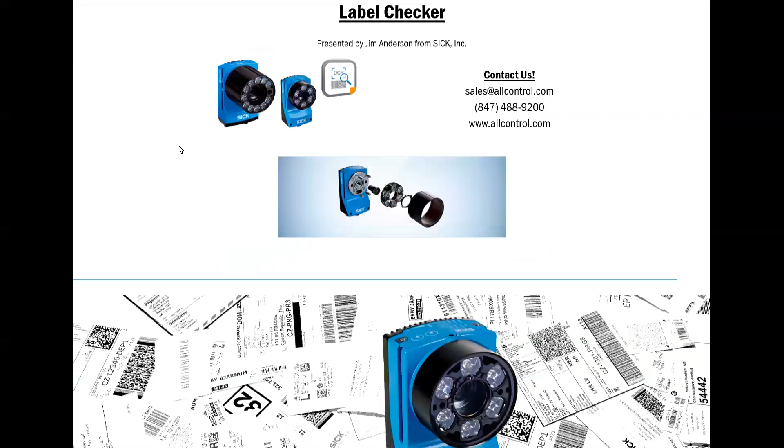So the label checker, what is it? The label checker for us is a way to really increase the competitiveness in a growing 2D marketplace. We see a lot of different camera solutions out there, obviously from some of the big players, Cognex, Keyence, Omron, other cameras, and we wanted to come up with a solution that would be obviously competitive, but also unique in some ways, and that's where we think that the label checker really steps forward.

It has a lot of high-end tools, but also a very simple user interface, no software to install, basically all done through a web system. Very powerful optical character recognition with the optional deep learning technology built in for improving reads, and also 2D inspections for pattern matching, blob counting, measurement of position of a label or the size of a label. So lots of different things that the label checker can do, and then it's all in a predefined small package, and easy to operate user interface.

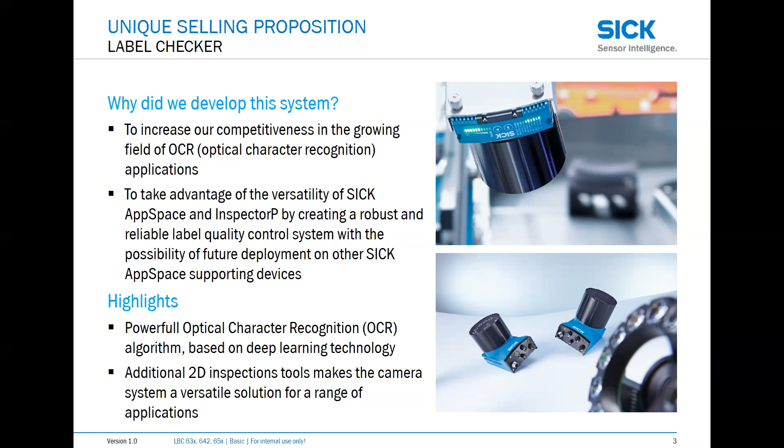So only the tools that you would kind of use for these applications, but also part of a larger system that if you wanted to expand into the rest of our portfolio, you would have access to a greater imaging library if needed.

This is based on our SICK app space architecture. So we have a set of hardware and a programming language that we can install very specific application solutions onto for a customer. And we have partnered with a global software company, MVTec, who makes the Halcon imaging library, and we have that also built into the SICK devices.

So you have the SICK library and the Halcon library available for really pushing those vision needs if needed.

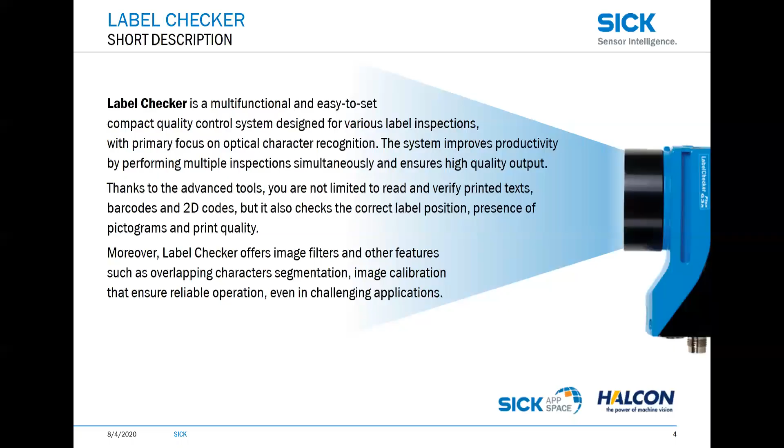The portfolio, like I said, we have a base set of hardware that is used across these different products, and the label checker and the lector are all based on the same platform, but it's a matter of what functions you can do and what software is loaded onto those devices. So the lector is a barcode reader with some OCR capability, or the label checker is a full vision system with true OCR code reading and 2D inspections.

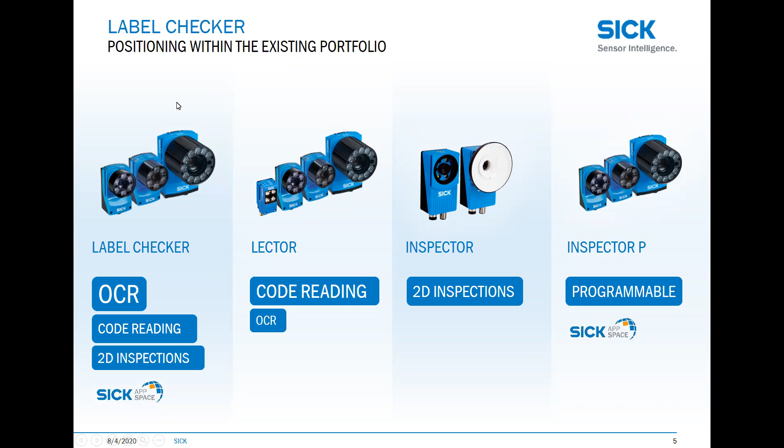And then on the far right there, you have the Inspector P, which is a fully programmable device, so you can write any code that you wanted and put that onto that type of camera. We've basically taken that Inspector P, written a very specific application, and that's what we call a label checker.

You can read characters and verify that they're the correct characters. Read multiple barcodes, 1D and 2D simultaneously. And then if you did need to add something in there, you could check for printed patterns, measure different pieces, but you could also add some of your own custom software if really necessary.

A number of different versions of the label checker exist, ranging from our label checker 631, which is a 1.3 megapixel device with options for S and C mount lenses, going up to the label checker 654, which is over 1-inch optics, a 4.2 megapixel camera with options for both manual C lenses and an autofocus lens that we have in that platform. So quite a range of products depending on what your needs are for your application.

This is a platform based on the Inspector P. So we have a number of pieces - you can buy the individual camera, lens, light, and hood, or you can buy the label checker kit, which has all these things already pre-assembled. Then you would need to buy a gigabit Ethernet cable and a power I/O cable, depending, and all these are available in multiple different lengths and options, depending if you're connecting it directly to power, or to one of our connection boxes. We have double-ended cables that make it even easier to mount the camera.

The label checker for us really opens the door to a number of different industries. SICK plays in all these different industries already: packaging, pharmaceutical, electronics, logistics, food and beverage. We really see the label checker having a strong play in packaging, food and beverage, and some in machine building, as the ability to do batch codes and read peen codes and laser etched codes is something that the label checker does really well.

That also gives way to some automotive applications. Logistics is something that we can do because we can verify print quality and label position and read the barcodes, obviously, but we tend to have other products that are maybe a little bit more suited for the logistics market. But packaging, food and beverage, automotive, and machine building are the main places that I would see the label checker being used.

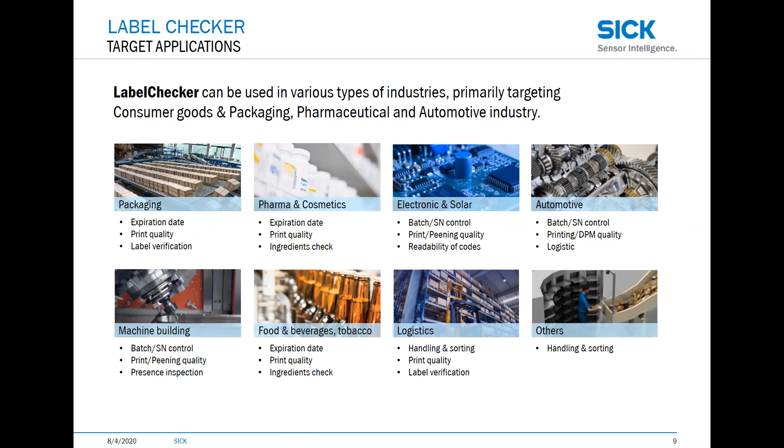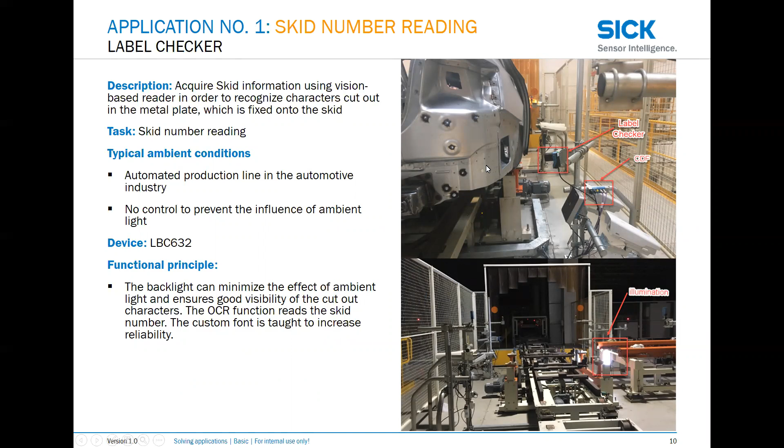Next to this system is an RFID reader that's reading the RFID tag that's connected to the body of the vehicle. And underneath the car, there's a carrier number with an etched out number. We are using the OCR functions to verify that the carrier number matches the RFID - the information in the RFID tag - to say that they match before proceeding with any of the additional functions in that robotic cell.

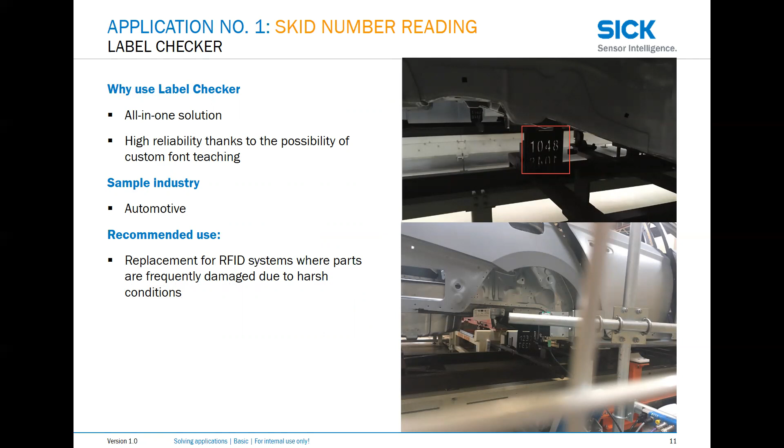Because they are both based on the SICK ID4 platform, they have the same communication protocols. Our RFID channel and our label checker can communicate seamlessly, and one can pass that information to the other saying yes or no, that is a match.

Another application is checking food labels. In this case, we're looking to control, just read the barcode and make sure that the object locator is finding the barcode. There's a pre-printed label, so we find the position of the logo, and from that logo, search for the position of the barcode.

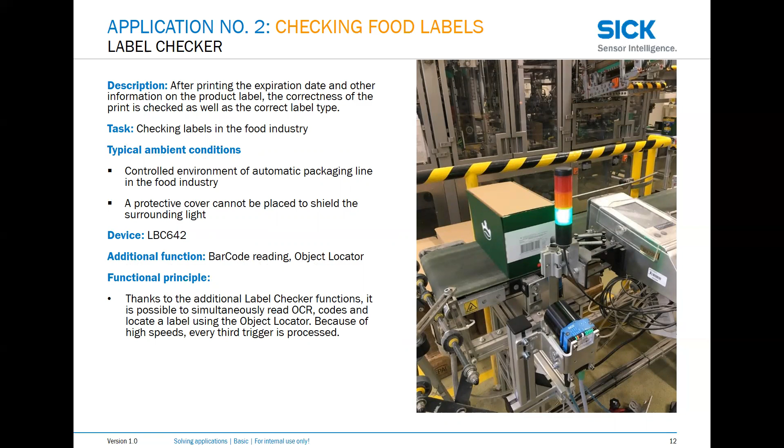It's a really simple setup: photo eye trigger tells the camera when to take an image. We have strong OCR functions built in, with the ability to use several native fonts built into the camera, which is a difference from a number of our competitors. A lot of our competitors can do OCR, but all the text and fonts must be taught. Whereas with the label checker, we have several fonts built in, including OCR A and B, a universal font that checks basically all the fonts that are possible. And if you can further identify exactly which font it is, you can get slightly higher performance in speed, because it doesn't need to search and test all the different character possibilities.

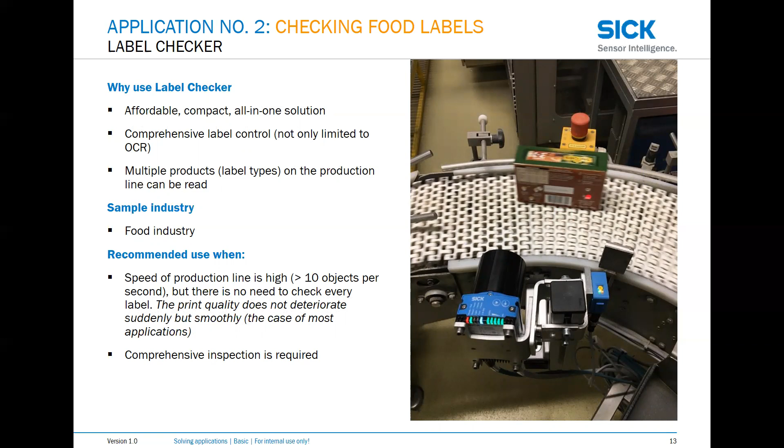But using OCR, you're able to do more than you can with just barcode. Barcode will tell you that it's the correct package. OCR can tell you if that use-by date or the information on there is printed legibly or completely, so the customer can read it. It also gives you another way of tracking, to make sure you didn't have a human error entering that information into your printer, so you can check and verify that the code actually matches with what it's supposed to be on the box.

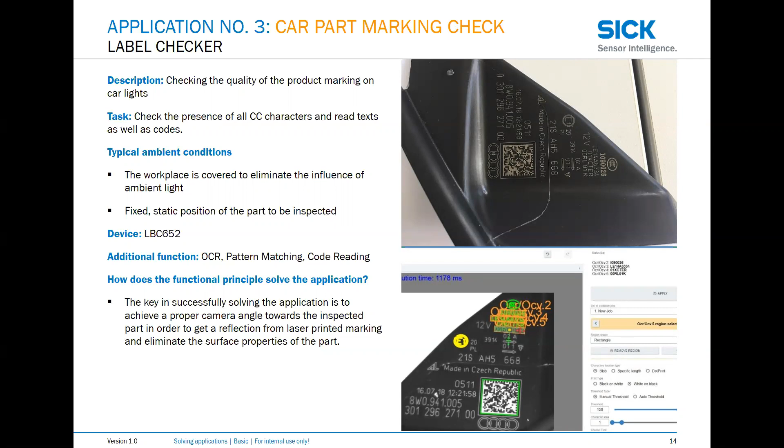Now, using the application functionality built into the device through Halcon, we're able to do some more functions, especially on these etched codes. This is a very good, high quality etched code, but this is one of those functions where we have multiple algorithms, one from SICK, one from Halcon, offering different functions in reading these types of codes. The SICK algorithm is a little faster in reading the barcode, whereas the Halcon algorithm allows for a bit more damage or non-conformity to the standard, so we can read codes that are etched with uneven depth, doing OCR and barcode simultaneously, giving you as a user a lot of flexibility to help in your control system.

So here's maybe the most standard type of label we've seen so far, reading a 1D, 2D code, also reading some OCR. You can see that the camera doesn't care if the text is upside down or right side up. We can invert the image, or search and tell the camera which way the text is oriented. It could be vertical, it could even be diagonal. As long as we know where that text is supposed to be, we can do the correct type of segmenting and then pull that into the OCR algorithm and tell you what characters they are. This is a really strong view of what we can do for OCR and multiple codes at the same time.

In this case, we are using the logo to identify which direction that part is in, and once we find that logo, we know where to search for each of those individual inspections.

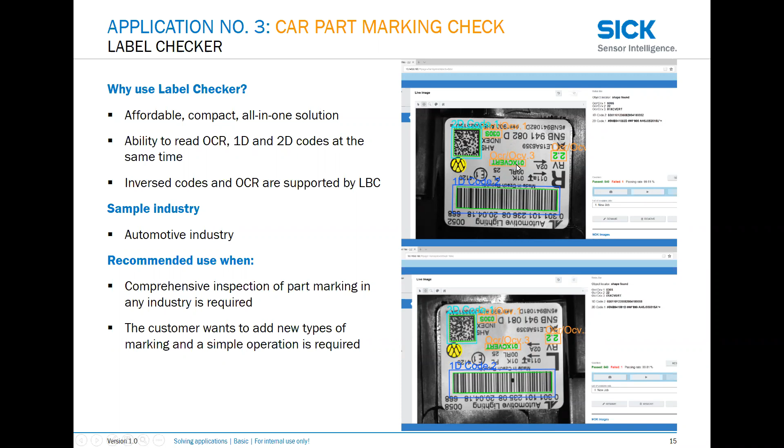One of the features that is not typical in a simple-to-use sensor like the label checker is the rectification feature. So what we have is the ability to calibrate and unwrap a label to make it easier to read, and also to compensate for any distortions that might be in the lens or just in the printing process.

So take this label that's rounded around the circumference and this arch. If you're just reading the barcode, that's not so hard. But if you're trying to read the text, it's not in the same line, and doesn't necessarily even look like it's the same size, because it's a bit further away on some sections than at the center tangent point. So when we use the rectification feature, we basically unwrap that, get a flat image, and now all the characters are scaled appropriately. We can read the barcode, read the human readable text, and also check those logos without having to do any fancy scaling that could slow down the camera.

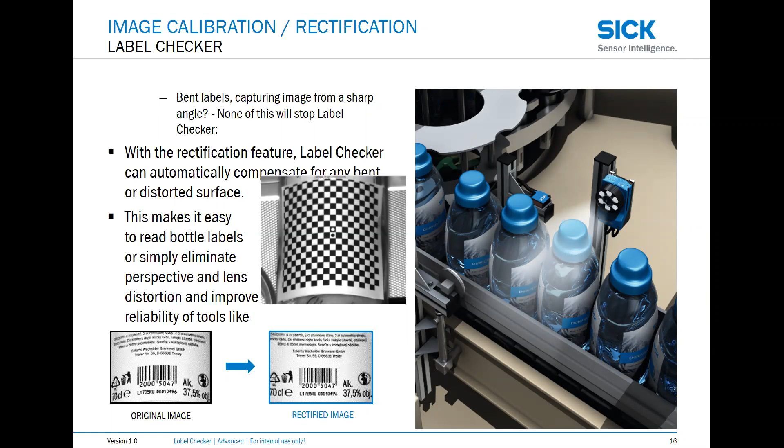So not only does it do the barcode, OCR, and those types of applications, it is capable of doing simple inspections as well. Is the label in the correct position? Is it in the right location relative to the shoulder? Is the cap on? Is the cap seated completely? Using tools like pattern match measurement and blob tools. There are a number of different things that can be done on board the label checker.

If you wanted to count the number of bottles, and there was a code printed on the top of each lid, you could read all those codes and count them based on the presence of the code, or presence of just the cap. So you could say there were 12 bottles, 11 of them also had codes that were read, and that could give you a pass-fail criteria if a certain percentage of products needed to have printing or other inspections before they were allowed to pass.

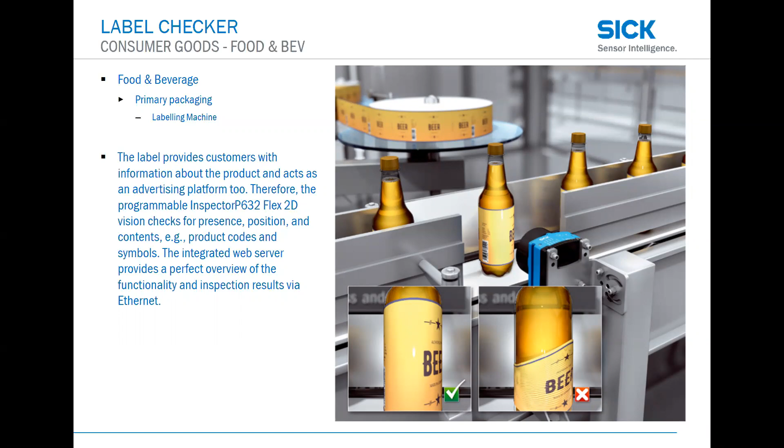One of the first major customers of this was a company that makes chocolates, and they were reading what is actually a pretty long OCR string, two lines, plus a barcode, and in this case we were doing this at about 15 items per second.

The original function requirement for this product was that it needed to do 4 labels per second. After testing, we were able to achieve 15. They were able to increase their speeds slightly, but there were other aspects of their machinery that couldn't keep up beyond the 4 labels they already had in their process.

This gave us a lot of encouragement that the system has a lot of overhead, so we can get in there and give a strong solution without slowing down production, providing both strong code reading and OCR functions.

One of the features that a competitor talks about a lot lately has been the addition of AI or deep learning into code reading or OCR functions, and that is something SICK also has in our OCR. We have the ability to continually add additional features and text to our library, increasing the reliability of the reads.

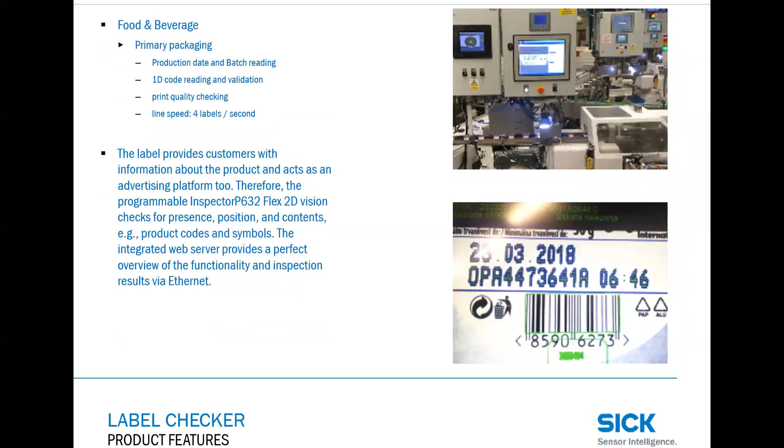Using deep learning, we have the ability to identify and still segment those features and give a good read. So one advantage of this product is the ability to identify and segment touching characters and dot-print characters.

We have the ability to mask out and read a number of different types of barcodes, so we can look for just the presence of, say, a square shape, use that as a reference, regardless of what is printed internally.

We could use a barcode as an object locator. We can use the functionality to read both standard and inverted text and codes. Depending on how it's printed — laser printed, etched, or dot peened — we have the ability to read those types of codes regardless of how they're printed.

We also have some additional inspections we can do with measurements — calibrated measurements — so we can calibrate the system to give you actual millimeter values as opposed to just pixel values.

Multiple jobs, so you can have a system that would send a signal to the label checker, which would allow the information that we're looking for to be switched quickly, have those jobs up and running without having to teach them every time there's a changeover.

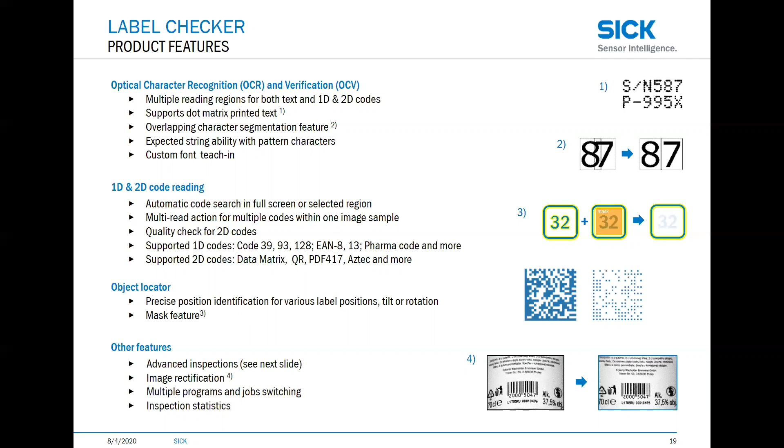Depending on which version of the label checker you're using, you would also potentially have different fields of view that you could use. The device that I have here for my demonstration has a dynamic focus function, so I can change directly from the software the focus position of the camera.

Some additional features that we can do: label positioning, image rectification, and then one of the reasons this is becoming more and more of a need is the label contents detection, looking at if there's potentially allergens or additional symbols on a label, to make sure that those are actually there.

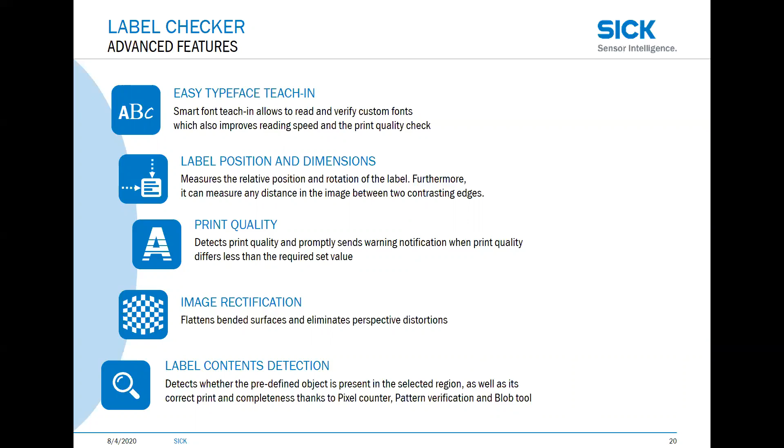If you're working with, say, gluten's becoming more and more that way, but definitely peanut and peanut butter have different functions that are requirements for labels to make sure that those are detected before going further.

We have the ability to add a micro SD card for cloning. So if you had multiple devices or something happened, you could take the settings out from the SD card, plug it into the next camera. It would be up and running basically immediately, other than the focus of the camera.

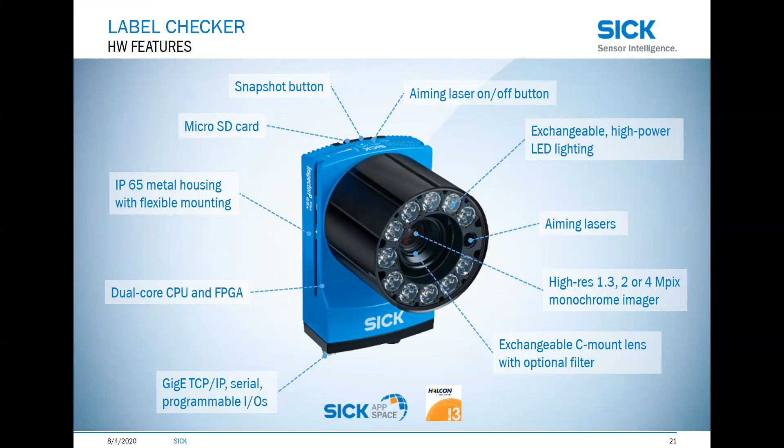We have both a dual core processor and an FPGA, so we offload certain functions of the camera to the FPGA to speed them up. And all sorts of other features, including an aiming laser, so you can see easily if you're at a distance where the camera is looking.

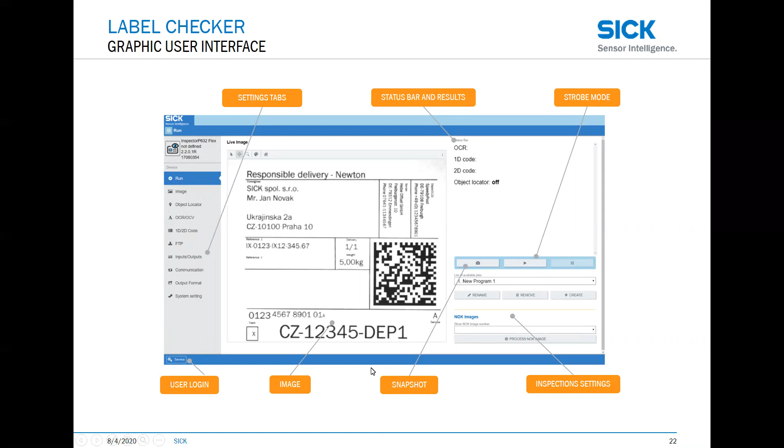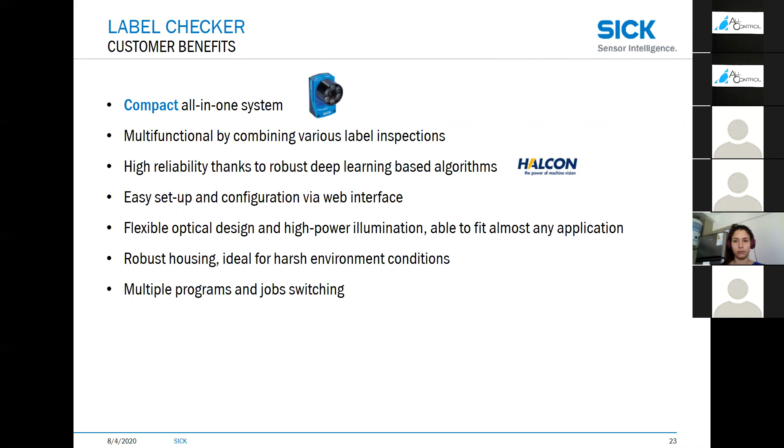It's a compact, all-in-one system with multifunction, combining multiple label inspections, making it truly a true label checker, not just barcode or OCR. It has those additional inspections as well, with high reliability and robust options for deep learning based on the SICK and Halcon algorithms.

It's a flexible design, so you can adjust the lighting and or lensing to fit just about any application. And then there are multiple programs available through job switching to make it even more flexible in your production line. So with that, I would like to go ahead and show you a live setup that I have here.

I'm going to start my camera and show you the setup that I have. I have a camera mounted about 1 meter above a printed target, giving me a real strong focus for this lens that I have available.

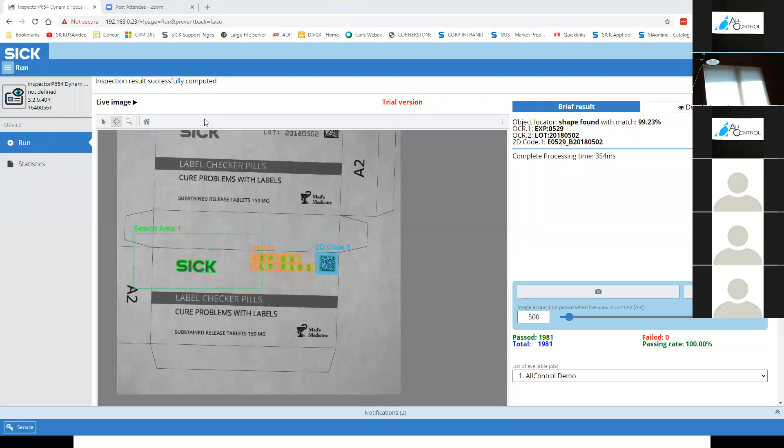And then I will go ahead and show you here in the software. So I type in the IP address of the camera. And you should type it in correctly.

While Jim is doing this, I think it's good to point out that that camera you have has the ability to change in or out the lenses, change in or out different kinds of lights depending on the labels you have. So even though we like to call it a vision sensor because it's kind of an all-in-one unit, it still has that ability. So you can cater your application, your label size, your resolution to what you need in the same kind of hardware. You're not limited.

Just to give you an idea here, the camera has multiple user level access. As an operator, I would be able to come in here and see what's happening. And if I had multiple jobs, I would be able to switch from one job to another, but I don't have a lot of ability to adjust the settings of the camera.

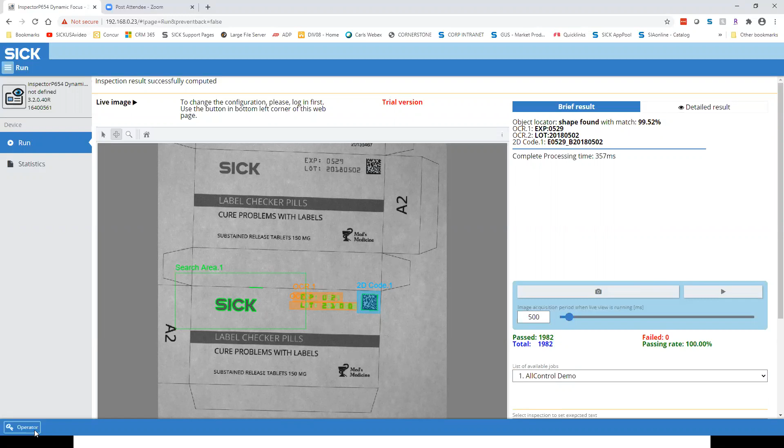So you have a service level. And when I log in this way, I now have access to all the programming. I can see all the items that the person could see as an operator, but I also have a lot more information. So you'd start out by gathering and setting up your camera to get a good image.

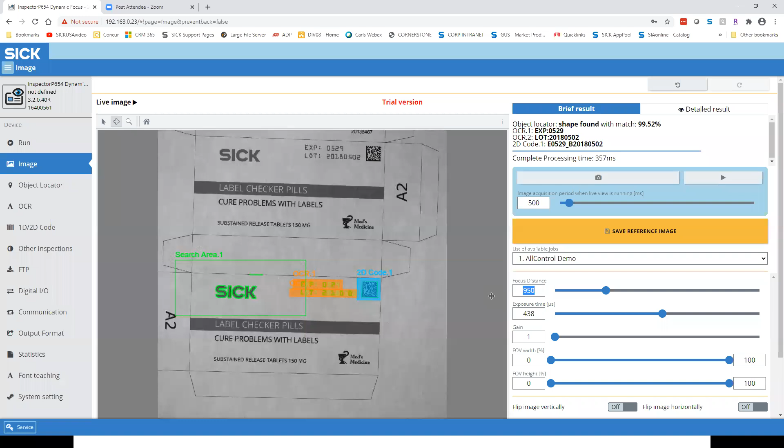Like I mentioned, the device that I have has a dynamic lens, so built into the camera I can adjust the focus. So if I change the focus to 1200, you can see that it starts to get a little bit fuzzy.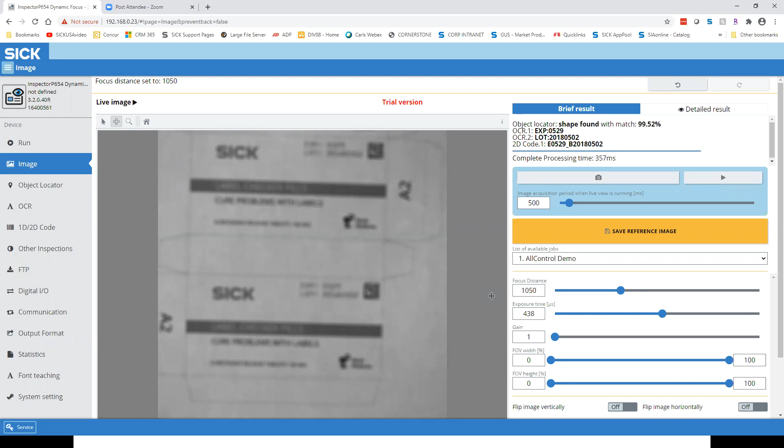Or if I go to 600, that's too close. So but if I had it at... now I get a strong image.

I can go now back and add in, save that image, and go to the next tool there, and add in the object locator, or I can add in an OCR tool.

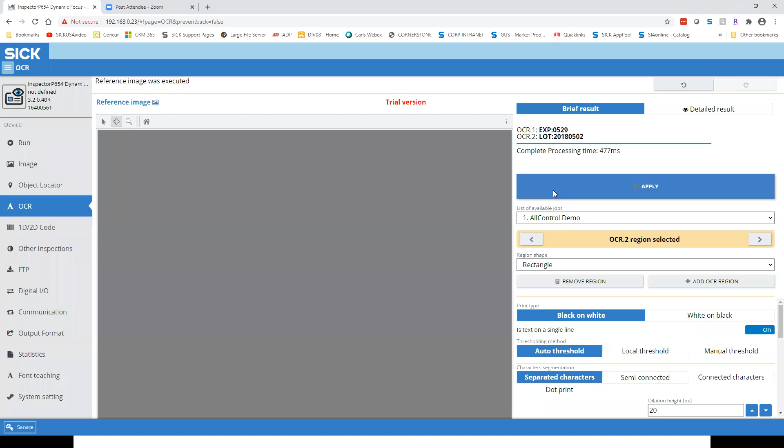So when I have an image, I can go in here and I would say add an OCR region and simply drag that to the area that I'm interested in reading text. Highlight that with the tool, and then apply that tool.

Automatically, without any adjustments yet, you can see that I'm picking up all the main characters. It is currently skipping over the colon. So if we wanted to read that colon, I would have to adjust the size and shape of the characters I'm trying to read, or maybe adjust the font.

So you can see here on this preset, what I've already done is I've put in a small dilation filter to make the dots show up, because right now those dots are not large enough to be considered a character.

Then I can go into the barcode section and add in a 1D code or a 2D code. In this case, I'll add in another 2D code. Same as before, just drag it to where the code is and apply, and then you get the readout of that text.

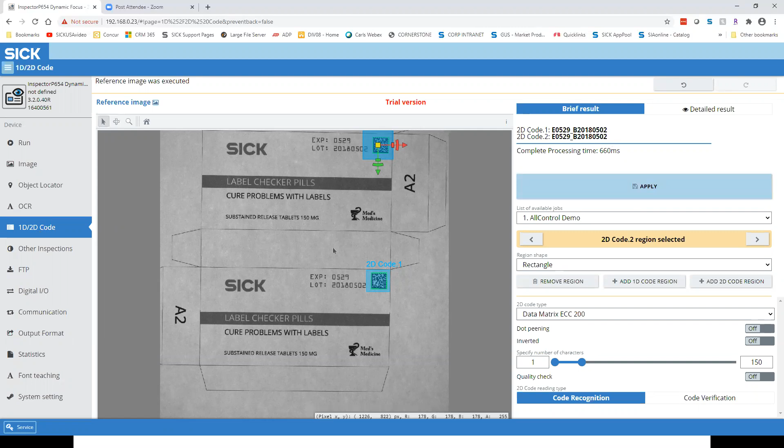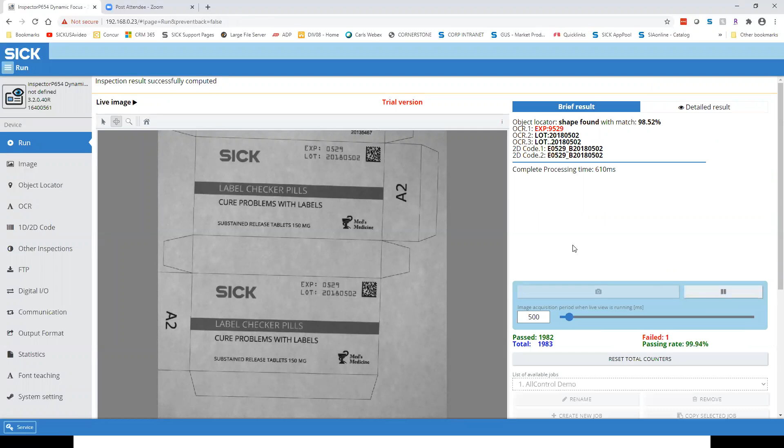Now there's a lot of other information available. So if I go into the run mode here, and turn this on in a continuous manner, you can see these are reading, and I can get the detailed result on each. I can look at each of the individual characters, how well it's reading.

I can get information about where that text is being read from on the box, and I can also get that same type of information on the barcodes. So I have the two 2D codes here, where it's giving me what it's reading out and the position.

It keeps updating. So if I go here just to the last read, it shows me the row, position, the print quality, and the overall time it took to read that barcode. So it gives me all that information in a relatively simple setup.

I have the ability to FTP, so if I have a location I want to send these images to - a lot of times people want to save the failed images. This is also a very good idea if you're trying to improve the readability using the deep learning functions for the OCR.

You save the failed characters, and then you can go back in and add those into your library, and that will increase the readability in the future.

You can set your IO as to what functionality you want - do I want a digital IO for just the barcode reading? Do I want an all pass? I have a lot of flexibility there.

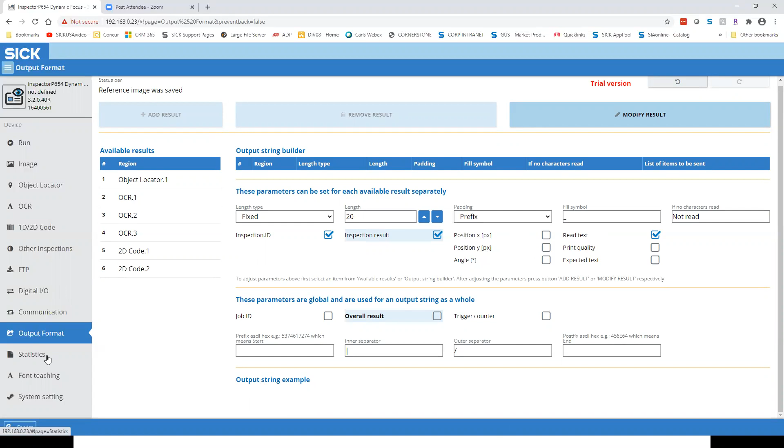So on the object locator, I have the opportunity to send out the XY position, the rotation angle, and also information about how well it matched. There's a number of different things I can send out without having to do any programming at all - some general statistics, how well has that been working?

And if any of the fonts built into the system didn't work, we do have the ability to go in and program those, like you would with any of our competitive systems. So lots of flexibility in the back end of the label checker to tune it in specifically for your application, but also just the simple user interface on the front end to be able to drag and drop some tools and identify if you want those tools to be in a specific area, like I did here.

It has to be in this search region, or I can have it be anywhere within the image. So identifying how flexible or how restricted you want that system to be, the label checker can really help you identify some of those problems that come up in the food processing and packaging industries.

Is there any questions that anybody has at this time? Any applications they would like to discuss?

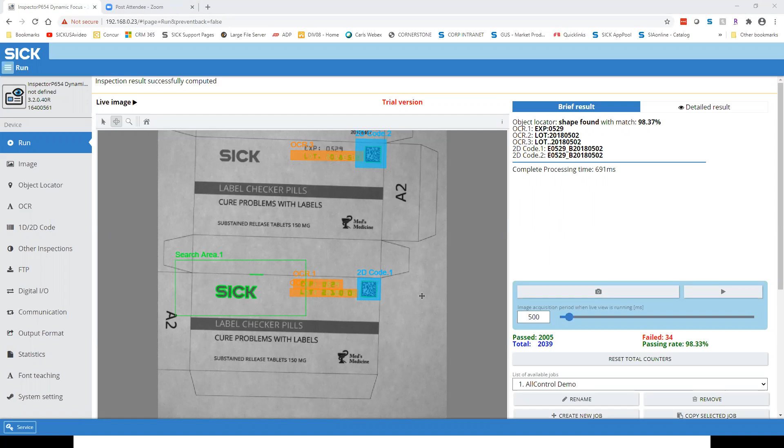I think the good thing is the product is called the label checker, but it can be used for a variety of different applications. We're looking at labels with barcodes and OCR or characters on them. But like Jim showed earlier in the presentation, he was looking at literally a car on a rail. We've seen a lot of different applications where barcodes have been printed on products, whether they're metal, plastic, or laser etched or dot peened into a surface.

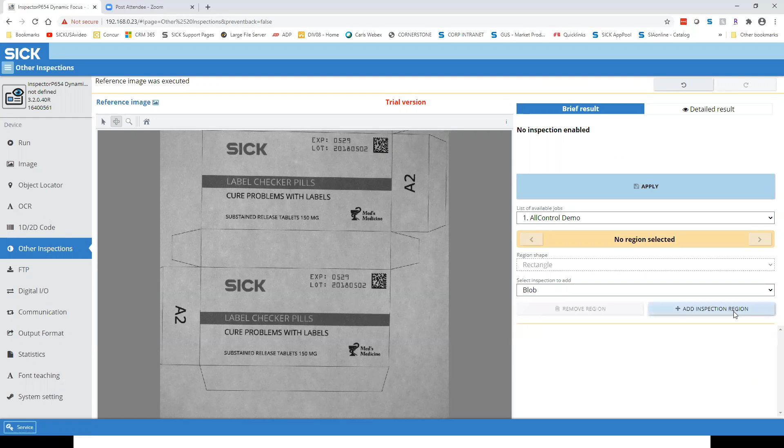So by no means is it limited to specifically only quote-unquote labels. There's a lot of different applications that wouldn't be a label that you could use this for. And it does have some standard types of vision inspection tools as well. So if you're looking to inspect something on a part and also read code or characters, that's something this has the capability of doing as well.

One of the things I'd point out is if we tried to use a traditional OCR on the SICK name, it would find the I, the C, and the K. The S is not defined in any font, it's a drawn character. So that would be something we could teach using our font teaching function, but it would not work with a standard approach because it's a drawn character.

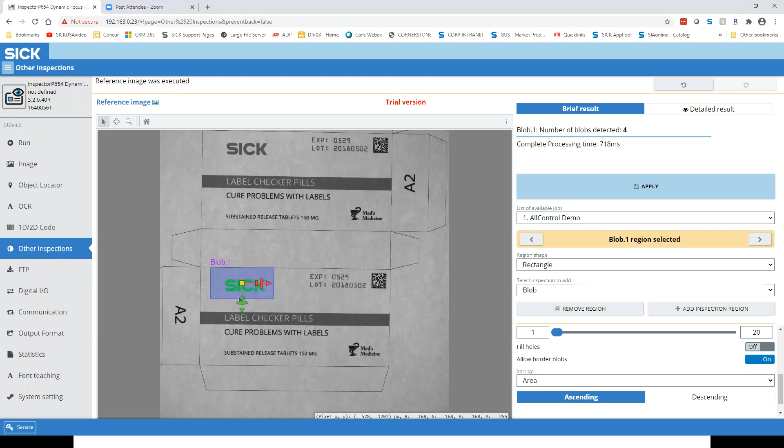A lot of times in labels, if you're trying to read that kind of stuff, companies have unique characters built into their name to make their brand stand out a little more, and that's one of those areas where font teaching can come in. Or you can go another way and just teach that entire shape, including all the characters, as a pattern, or use that as an object locator. So there's a lot of different ways to work with the different tools in the label checker.

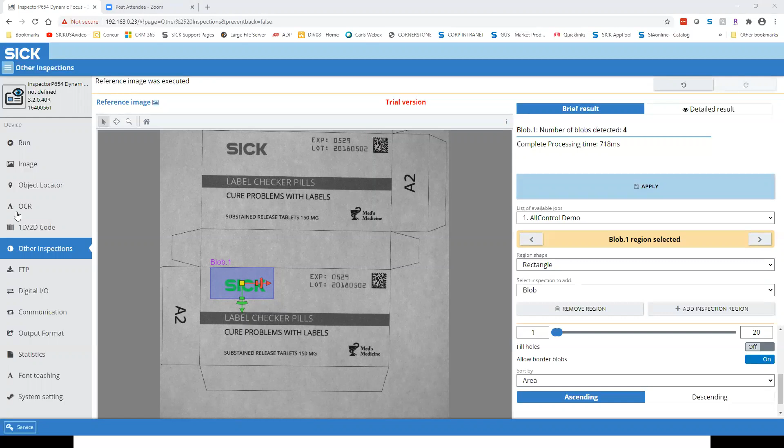That's a good point to bring up too, because obviously there's an unlimited amount of fonts out there and different kinds of label types. One of the good things about this product is that a lot of them are already taught in and saved from SICK, but extra things on your products or your customers' products that are different kinds of text or fonts can be taught as well, and that gives it the ability to read any kind of printing. Correct.

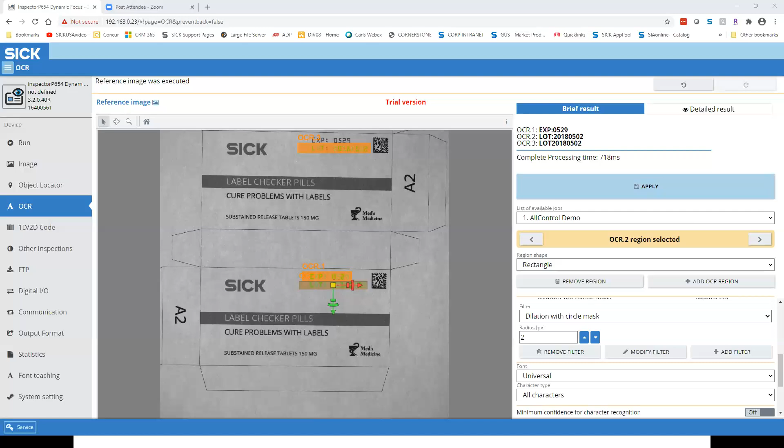So, if I go back to the presentation here, I guess that's way at the beginning. The fact that this lens and lighting here is replaceable or selectable based on your application, and we do have a version of this that is an IR light, so that it could still be built into that self-contained housing. And that could help in those types of applications.

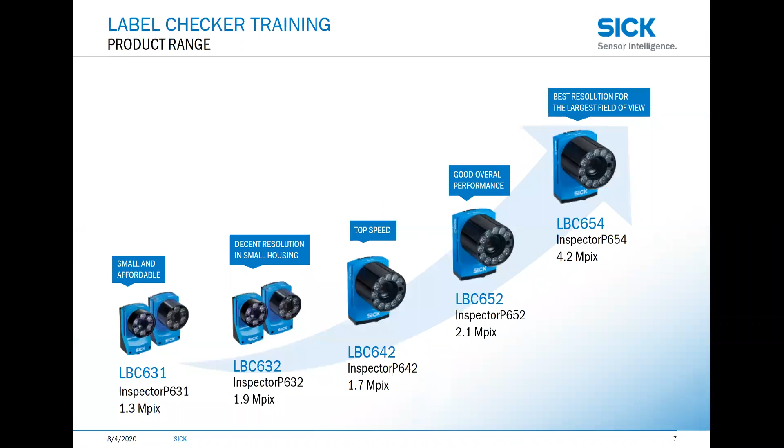But there's also blue and red and white. So depending on what the application is, you can help create the highest level of contrast with lighting. We can also add filters directly over the lens to have a white light and filter out other colors based on the lens, or vice versa. So you can increase contrast by the color of the light, and then filter those things out on the lens using different colored lens filters. So there's a lot of flexibility available because of this built-up solution.

Yeah, I think that's a good point, because now we don't have to focus on the software or bringing in external lights. We could potentially just replace that standard illumination with an IR one, and we might be able to solve the solution. Right, that gives us flexibility in a lot of different applications to choose the lens, the light, everything based on that, and everything in the end still looks the same.

Yeah, so the device you're borrowing of mine at All Control, I think it has like a whitish blue light in it. But in my hand here, I have the IR option that would go into that same camera. So we have those readily available for testing and on the shelf, depending on what you need for an application.

So be sure to reach out to the folks at All Control, and they can bring in the correct people at SICK with the correct hardware, or a bundle of hardware, to do some quick testing. Or we can send in some samples to our Vision Lab in Minneapolis, and do some testing there where we have access to all the different varieties and give you the best option for that application.